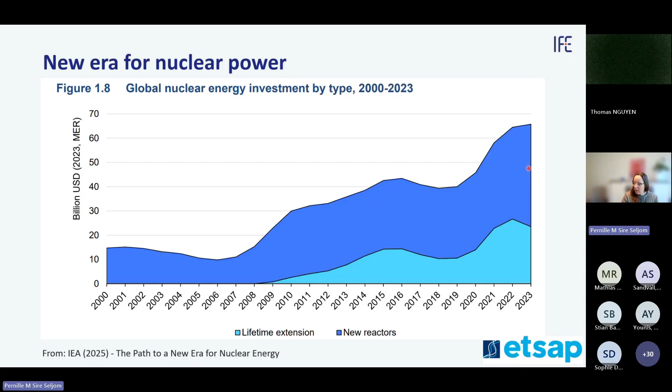Just a very short background, and I'm sure most of you are familiar with this, but we see that nuclear power is taking a larger and larger share and is becoming increasingly more a part of the energy system. But what we also see is that a lot of what is currently under construction is happening not in Europe, but in China. Most projections and scenarios, including those from the International Energy Agency, assume that we'll see growth in nuclear power towards 2050.

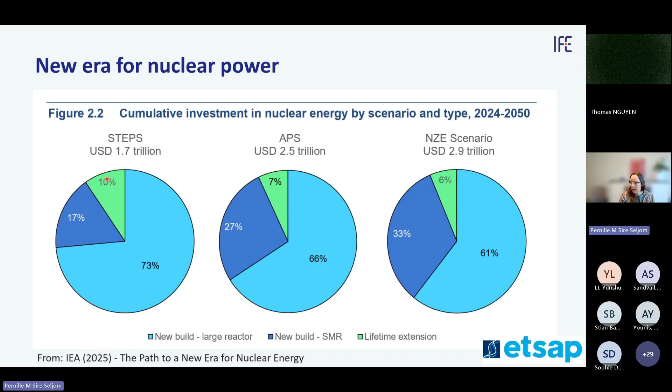Here are 3 different scenarios that the IEA has, and that includes both new large-scale commercial reactors, new builds, the so-called small modular reactors, and also lifetime extension of commercial reactors.

These small modular reactors have renewed the interest in nuclear power. They are smaller in that they do not have the same capacity as conventional nuclear power, but there are many different concepts that different actors are working on developing around the world, with different technology solutions, cooling solutions, and so on.

But in the first run, in the near term, we see that what will come as small modular reactors will be a downscaling of commercial nuclear power, but in the long run it could be new technologies that emerge.

And the advantage with these reactors is that they are small, meaning you can also locate them in the grid where it's easier to locate them, where there is space in the grid, for example. And they are intended to be modular or more prefabricated than commercial nuclear power.

And also, since they are smaller, maybe they can be located closer to population, and it's easier to use excess heat and so on. But there is great uncertainty related to the development of this technology - what will be the winning technology in the end, and what will it cost, and so on.

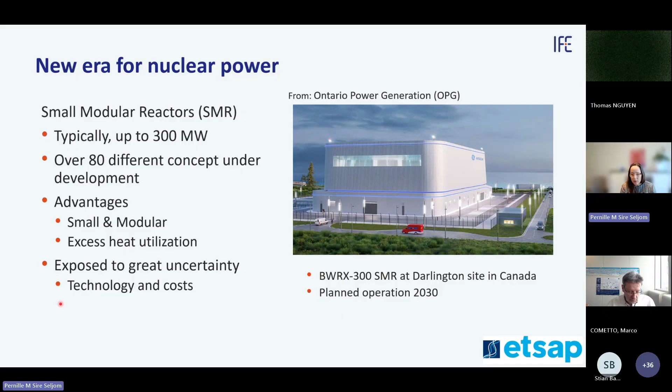But there are small modular reactors under construction, and this is from Canada, where the first module of a 300 megawatt module is under construction and is planned to be operated in 2030.

So now I'm done with the background, a bit about our workshop. That kind of is the basis for this project.

We were 23 participants from 13 different institutes, 11 nationalities. We also have participants from the Belgian Nuclear Center and IAEA. And we worked on how do we actually model nuclear power in energy system models. And we also discussed and found solutions for what are the key challenges and where are the solutions for us going forward.

So if you want to read details on how different teams have modeled nuclear power, I recommend you read the reports. But what we see is that some teams model conventional nuclear power only, some teams model small modular reactors only, but we also discussed maybe it's not that different how we model these types of technologies. But what we see is that there are very different ways - the technology detail level incorporated in the models varies a lot between the different teams.

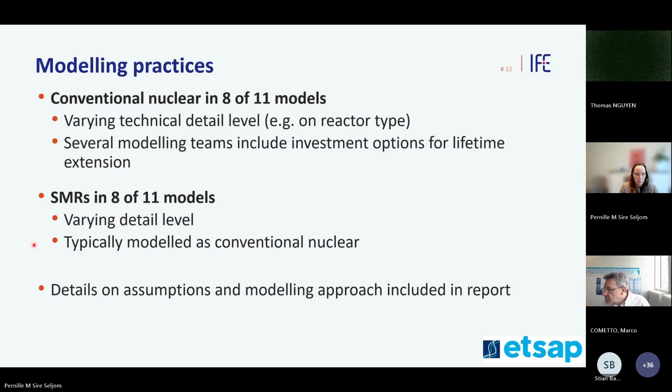And also some teams mentioned that small modular reactors is just modeled the same way as conventional nuclear power, with different assumptions maybe on costs and when it can be available and so on.

So in the survey, we asked, what are you doing of assumptions that have the biggest effect on your results on nuclear power? And the first on top of the list was costs. So it was a key finding that most teams find that cost is the main assumption that affects the investments in nuclear power the most.

And then it was primarily investment costs, because that's the larger part of the cost share. Second was the energy system configuration - so the energy system that the nuclear power will be placed in. What are the other energy opportunities in that region, country, continent?

So how much nuclear power you get really depends on how much other renewables you have available. And for example, if you have stringent land use availability, that could also affect investments in nuclear power. So it really depends on the setting of this energy system.

It was also mentioned that how we model operational flexibility and cogeneration of both heat and hydrogen affects the investments - that was third. And then it was mentioned how we include resource and material supply chains can also affect investment decisions on nuclear power. For example, water availability for cooling, or the supply of fuels, uranium, for example, or for the technology itself. And then other constraints like energy security and so on was also mentioned as important assumptions that affect the investments in nuclear power.

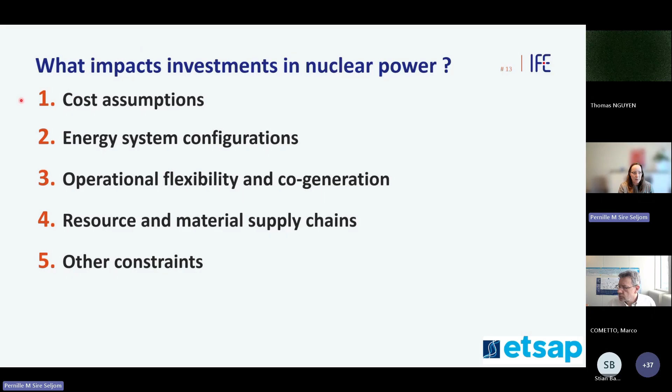But on the top, it was costs and investment costs, and it was energy system configurations.

We also, in the workshops and the report, went through that costs are different things. And we made these kind of pie charts for all the different modeling teams. But what we see is that the overnight cost has the greatest share of the cost of nuclear power. But if you go to the right here, this is what is typically an input to a TIMES model. So there are several things that can affect the cost of nuclear power in an energy system model.

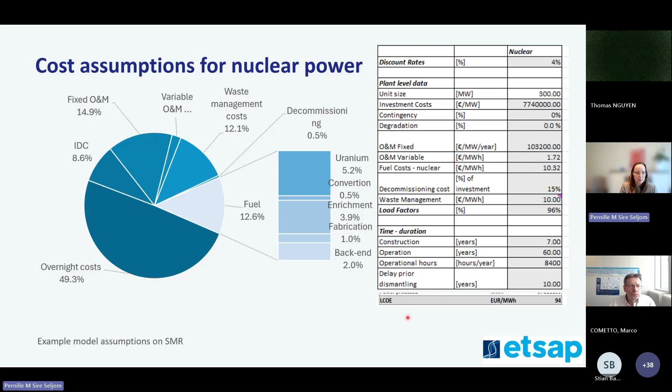So you will get more inputs on the different cost components in the report. And all the teams, they acknowledge that the costs are difficult, but we also challenge them to say, okay, but just put what you have now or what you have used before. And then we compared the LCOE of the different teams.

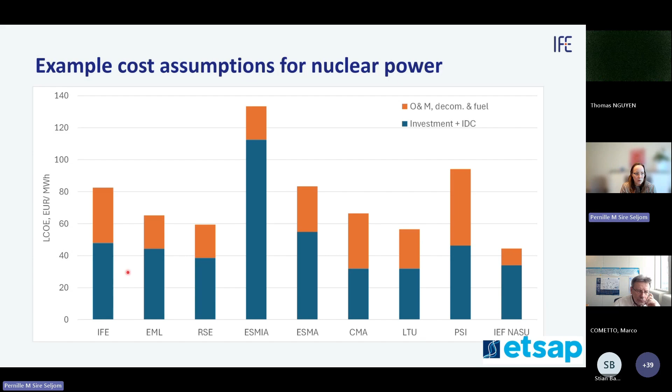And we also see there's differences in the distribution of the investment and interest during construction and the operational costs. So there are differences, but all of us, all the teams, acknowledge cost is difficult, and using one cost in many cases doesn't make sense.

So we identified some modeling challenges, and the first was how do we find costs? There is a large uncertainty in the cost of nuclear power. First of all, there has been very little conventional nuclear power built in Europe in recent years, because a lot of these teams were European, as the workshop was in Brussels. We also don't know what will be the cost development of the small modular reactors.

There's also uncertainty in policy and regulation. Maybe some countries would like to subsidize nuclear power, and then a techno-economic model maybe doesn't make sense because it's a desired option independent of the techno-economic profitability, or you need to have policy in place to have nuclear in a country. So there's uncertainty in policy, also uncertainty in supply chains and material needs, and small modular reactors is not one solution. It's a lot of different concepts and solutions, and the difference between third generation and fourth generation. So it's actually more than one. It's not just to put assumptions of one solution.

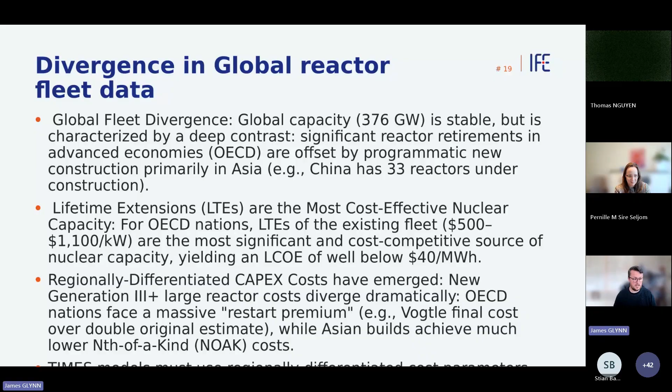Cost overruns and construction time rising up anywhere from 7 to 12 to 14 years in some cases, while Asian builds are being achieved on time and on schedule, probably at a quarter of the price and in 3 to 4 years. So this cost differential needs to be taken into account depending on what region you're modeling in your TIMES model.

While there's an awful lot of talk about small modular reactors, they're still pre-commercial. There's only one that has a contract globally, in Canada, and the promise of small modular reactors is that they can remove the cost uncertainty and bring it into a factory to regularize and modularize construction. But to do that and have energy technology learning, we need an order book of 5 to 10 reactors to start bringing down those costs.

One of the biggest barriers that are a concern for fourth gen reactors and small modular reactors is the fuel supply. So high assay, low enrichment uranium isn't produced in Western nations or in the OECD. It's produced in Russia and in China. And so the supply chain for fuels for SMRs is in the hands of a few countries, and that would by some be considered as energy security or geopolitical risks.

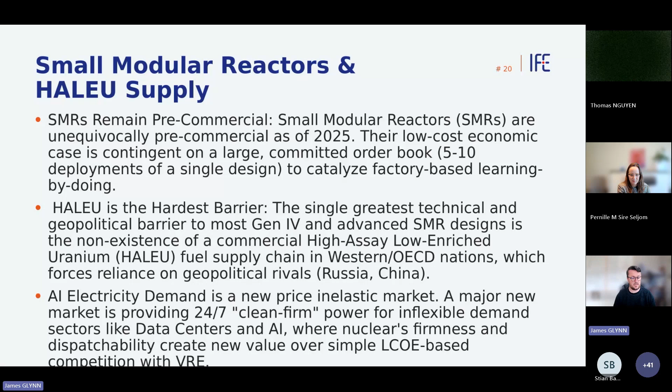We're also seeing that electricity demand from AI and large data centers is driving this new demand for clean, firm power that is price inelastic, i.e. doesn't care too much about the cost of electricity, and is really driving interest in new reactors, or small modular reactors, and restarts of nuclear power in general, to restarts of units in the US.

So there's a lot of data in the technology brief. I'd encourage you to go and have a look at it. It's geographically differentiated between North America, Europe, and Asia and the rest of the world. And it gives you some of the data here that I'm listing. So the cost of lifetime extensions, regionally differentiated capex costs, gives the lead-in construction time, which is an issue, and a binding constraint in models.

It gives some details on unit commitment capabilities, so ramp rates, minimum stable levels, that's seen within historical reactor operation. And there's some details then about endogenous learning rates that are required to move from first-of-a-kind reactors to nth-of-a-kind cost reductions. There's also some details about the needs for supply chain modeling for HALEU and the next generation of fuel supplies required for SMR and Gen 4 reactors. That's all I have.

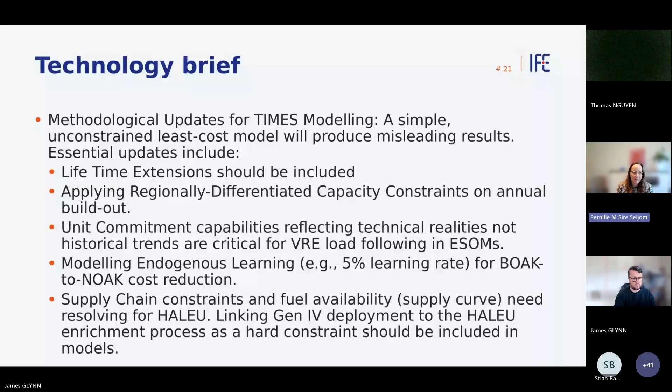Pernille, so I'll hand the floor back to you. Thank you very much. So if you are modeling nuclear power in any type of investment model or a long-term energy system model, I recommend you to read the technology brief. And now we'll move on to Yunshu Li from the IAEA that will present how we should represent nuclear power in energy systems.

Thank you. So now it's not in presenter mode. We need to change it. Sorry. No, it's not easy. But you are also writing a report, right, on modeling guidelines? Yes, indeed, we are doing that. Thanks for introducing that to the audience here. Do you see it now? Yes, now it's perfect. Okay, perfect.

Okay, great. So thanks very much for having me on this webinar. We are very happy to be here. Actually, some of my colleagues are also joining because they're interested in the work that you are doing. So I am from the Planning and Economic Studies section. We do modeling, we do economic analysis, we also do capacity building for countries. So part of our work is actually technology agnostic. We don't just look at nuclear, but we also look at other technologies, particularly in our capacity building work. We work with countries that do not have nuclear yet. But as our name suggests, we also focus sometimes on looking at nuclear.

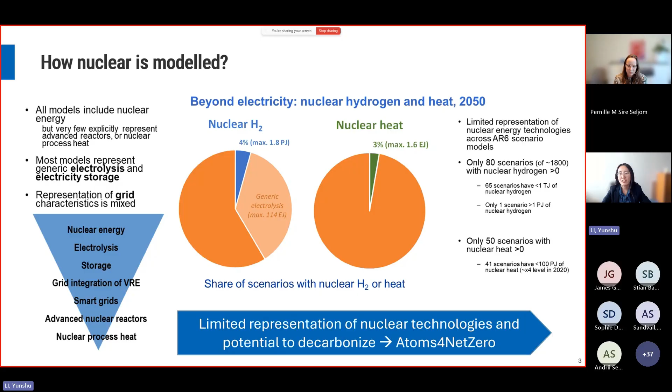And therefore, we actually have an initiative called the Atoms for Net Zero Initiative. This initiative is aimed at supporting member states in evaluating nuclear's role in net zero pathways. What we do within the section and within the IAEA is provide analytical tools, data, and benchmarks for energy system modelers. This is because we recognize that the way nuclear is represented in models can materially shape policy outcomes.

This is not to say that we want to shift the way nuclear is represented to favor nuclear. We just want nuclear to be presented in a way that is fair and accurate based on its technological and economic parameters. So our current work includes some meetings. We have met with some of you in our in-person meetings, or online in our consultancy meetings. These consultancy meetings bring together the modelers and IAEA staff, and we discuss specific representation problems in models.

We also have technical meetings. These are wider meetings, exposed to a wider group of experts, and we convene on the use of the modeling tools, and sometimes also discuss the modeling methodology behind the results. In addition to that, we also offer direct support to modeling teams in different countries on evaluating nuclear's role, either by teaching them how to use the model or providing some form of analytical support.

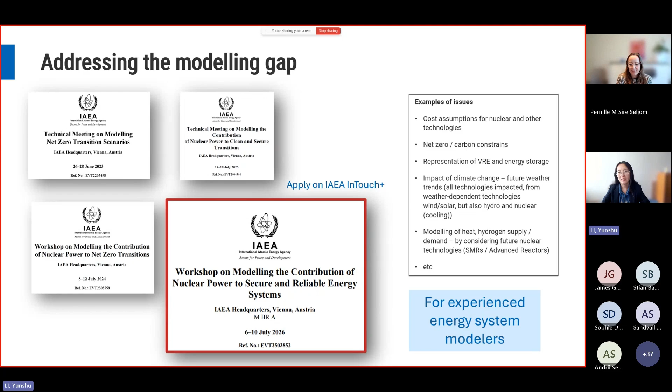So then maybe we can move on to some of the key points or key issues that we think are important to the modeling of nuclear power.

So the modeling pitfalls we often encounter with capital costs in models is applying a single global cost without specifying where the projects are being built, and the status of the design, whether it's first-of-a-kind or nth-of-a-kind, and also mixing cost definitions. Are we talking about total project cost for nuclear, but only overnight capital costs for solar and wind? That is something one needs to be rather careful about.

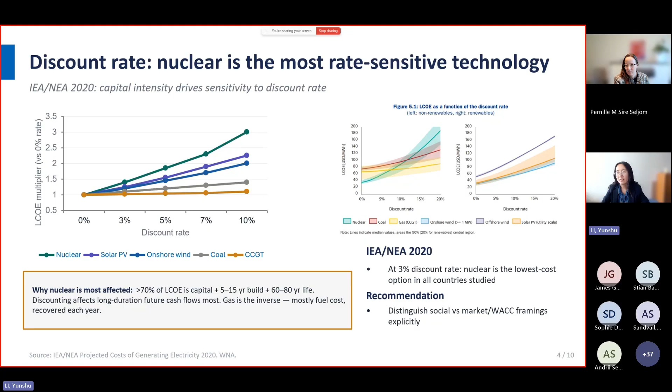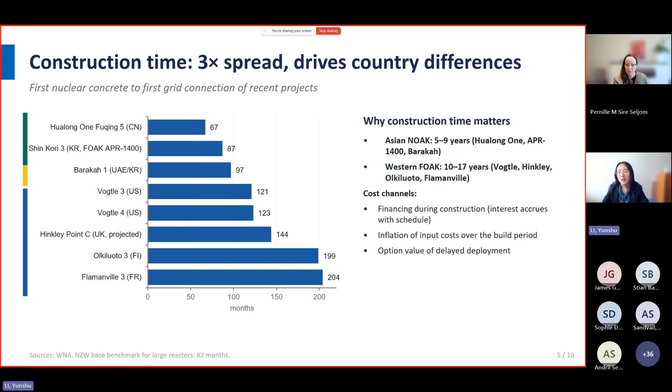The next thing, which the colleagues have already alluded to, is the representational flexibility of nuclear in the models. This example is actually from my colleague, Marco, who is also currently in the audience.

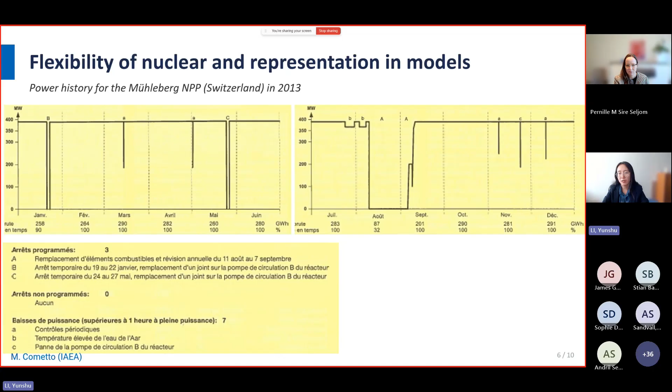However, this is not always the case. This is more of a matter of economics rather than the nuclear's technical capability to ramp or not ramp. When we look at the French fleet, we actually see that in France, there are quite a lot of nuclear reactors, so some of them would have to operate on a margin. This is a power history of a French PWR reactor over a period from 2008 to 2009, over around one year. We see that, say, like a 10-day period around Christmas, circled by this dotted line here, the nuclear power plant is actually able to do this kind of load following.

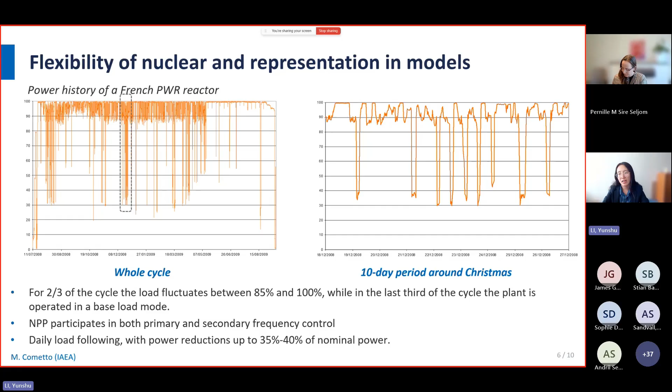For two-thirds of the fuel cycle, the load can fluctuate quite a lot, but in the last third of the cycle, the plant is operated in baseload mode. This is actually a restriction on the technical ability of the nuclear power plant, but for the first two-thirds of the cycle, there is nothing that says nuclear power plants can't ramp. We see the same for German reactors - six E.ON nuclear power plants during 24 hours. We also see that they are able to change their production.

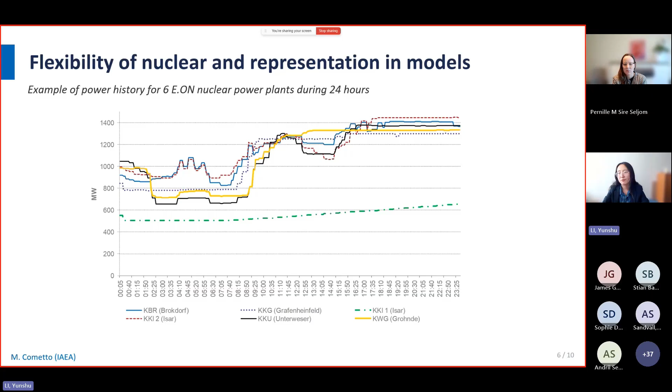I will just mention this part here. So we have spoken about how flexibility is a characteristic of nuclear power - it is possible for nuclear power plants to do that. Within the model, how this is represented can also have an impact on your results.

A researcher, Jenkins, in 2018, published a paper that looked at modeling of a US Eastern interconnection model. In that model, they were explicitly testing how flexibility would affect the results. For instance, if you have a must-run nuclear power plant, meaning it has to produce all the time at a flat profile, then you will see a lot more renewable curtailment versus full flexibility, where your curtailment will be reduced because then your nuclear power plant can actually do some variation in its production. We know this theoretically, but does this really occur in reality?

If this does occur, then if nuclear power plants are always being operated as a marginal power plant, on the margin, it might face this issue called the missing money problem - it may not be able to recover all of its costs incurred just from the energy market alone. And that is why we often talk about these out-of-market revenues for nuclear power.

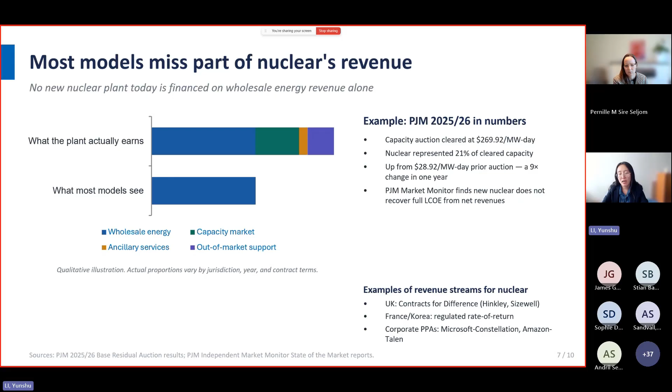Continue, great, please, thanks. So another point we want to talk about when we talk about modelling nuclear is obviously nuclear's application for heat production. IAEA has done quite a lot of work mapping how nuclear can produce heat and support industrial processes. We see that for some processes which require very high temperatures, nuclear is actually in a perfect position to produce that kind of heat.

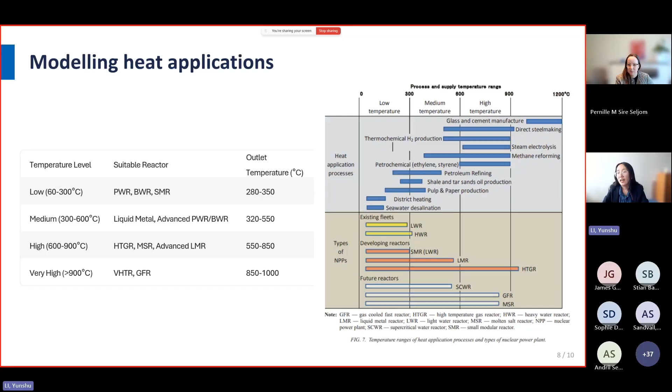One thing we also discussed quite extensively is that cost optimization may not be the only question one should think about, since the objective of society is not just cost, as was also mentioned earlier. So the real question is rarely, is nuclear the cheapest? Should we have nuclear at all? We have colleagues, Rocco, who actually did some parameterization of different dimensions surrounding other aspects that policymakers would consider.

In addition to cost, some examples where this is true in reality are the kind of phase-outs we are seeing post-Chernobyl, post-Fukushima. This phase-out is not because nuclear was driven out cost-wise, it's because there are other factors that are currently being considered.

Another thing one needs to look at is that the inputs are not known with certainty. As we have also seen from your modeling inputs, you have quite a high range, a huge range of different costs put in for nuclear. That would be one type of uncertainty we know, not just uncertainty between models, but also uncertainty into the future. We don't really know how much things are going to cost.

So we have colleagues who have done work related to long-term and short-term uncertainties. Also, when we look at weather patterns, there are short-term uncertainties that will affect the power market and therefore affect nuclear's role.

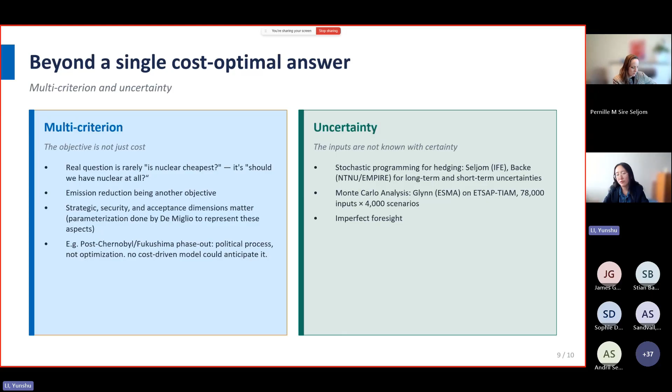There are a lot of other parameters that warrant attention, I will not go into them. Each of these parameters has its own modeling pitfalls. In our modeling guidelines, we are trying to describe them for treatment recommendations.

As we know, with growing energy demand from data centers, some may say this demand profile in the future would be flatter because data centers require more constant load, but we have also seen there can be power surges related to the current use of non-traditional AI. That is something that is maybe unpredictable, and we are particularly interested in including this aspect in the guidelines. If you have any inputs, we would be very happy to welcome that.

For the next steps, we have already mentioned we are looking for review by end of Q2. We are looking for publication, and we want to present this during the meeting in July in Vienna. So if you are here in Vienna, maybe you will be able to see the final outputs from this work. Thank you very much, and sorry that I ran a little bit over time.

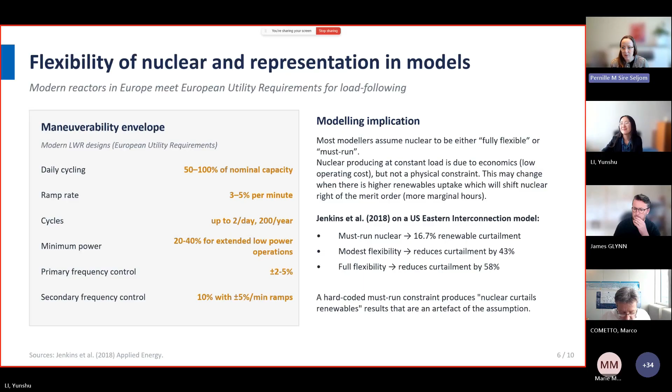Now we will just go a very short deep dive into how we can model, with some examples of modeling of nuclear in TIMES models. We will start with James Glynn, who will illustrate some analysis related to data centers and nuclear.

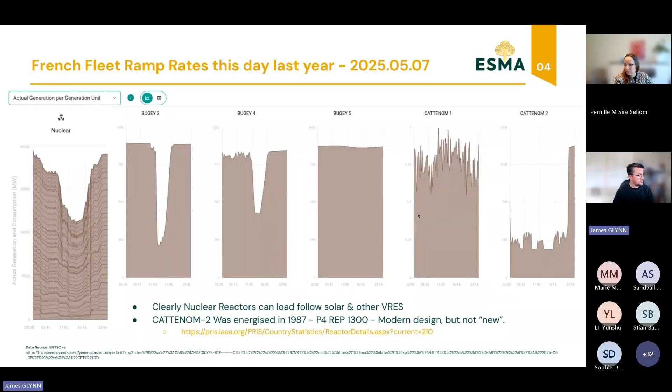The other thing I want to say is that these two reactors on the right-hand side are modern designs, but they were built in 1987, so they're not particularly new in their level of advanced rampability or capabilities. So that's just a baseline: what can individual units do in the French fleet?

So then looking specifically at — sorry, this is jumping around the place — data centers in Ireland: they consumed about 22% of electricity demand last year. It's probably the largest national share of electricity consumption by data centers globally. You see other hotspots in Virginia around the Pentagon in the US, similarly in Paris, Frankfurt, and increasingly in Tokyo and Beijing. But in Ireland they're already large and growing at a significant rate, about 6% electricity demand growth year on year, and that's outstripping the ability for new wind and solar to provide new generation and reduce the carbon intensity on the grid.

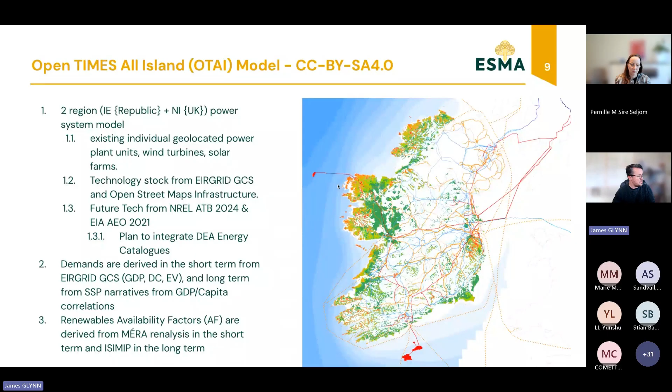The demands are from EirGrid GCS, kind of short-term projections, and then the long-term were derived from SSP narratives, and then the operation of wind and solar is based on weather reanalysis in the short term and climate-adjusted Earth system models for the future.

So very briefly, and Pernille, tell me if we're maybe 2 or 3 more minutes.

So typically we haven't really included operational unit commitments in TIMES models. So just very briefly, I've included nuclear reactor unit commitment ramp rates and cycle rates as best I can, following this updated data from the energy technology brief, but I haven't included that ramp rate and minimum stable levels as a function of the fuel cycle that Yunshu mentioned earlier. So merging unit commitments and dispatch modeling into TIMES-type modeling is what I'm exploring here just for the power sector.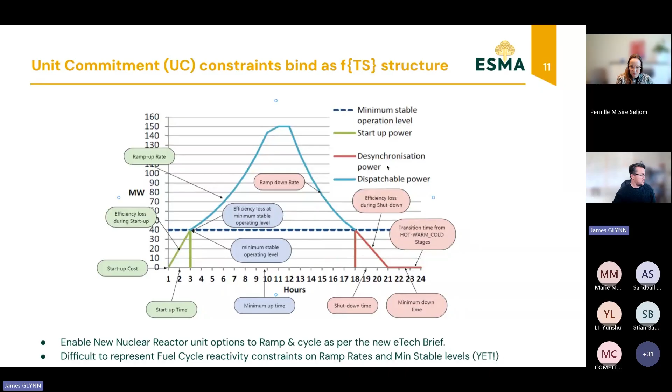The other thing I would say, and I've said it quite a few times in these closed meetings, is that our time resolution really matters to how we capture the variability from renewables for many different reasons. But within TIMES models, given that we're not just modeling power, we're modeling all sectors, the whole system, when we start to go to hourly and 15-minute resolution, you can create models that are in the order of 200 gigabytes to a terabyte of RAM, and it just becomes nearly impossible to solve.

So being very careful about creating your time structure is something that I've talked about before, and again, I have this hybrid time structure where I'm trying to capture the moments and the minutes and hours and weeks of maximum stress on the Irish grid. So maximum demand, maximum generation, maximum wind generation, maximum solar, and then the lowest generation weeks, so the Dunkelflaute for wind and solar, and replicate that going forward.

So then the scenarios that we ran is not just 2 or 3 scenarios, it's looking at different time resolutions with unit commitment, with discrete new capacities turned on and off, with construction lead times turned on and off, with critical mineral supply chains turned on and off, forcing nuclear on and off, and then having electricity demand ramping or growing faster because of data centers.

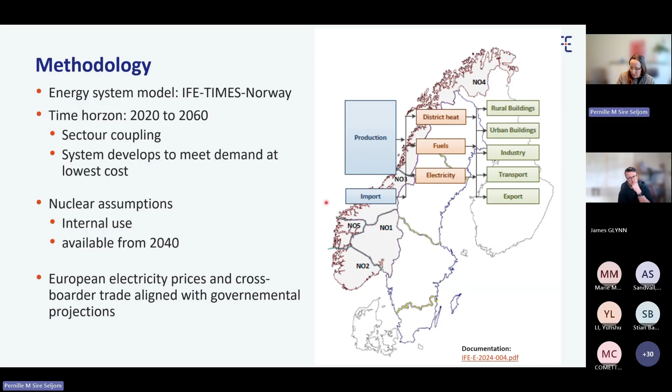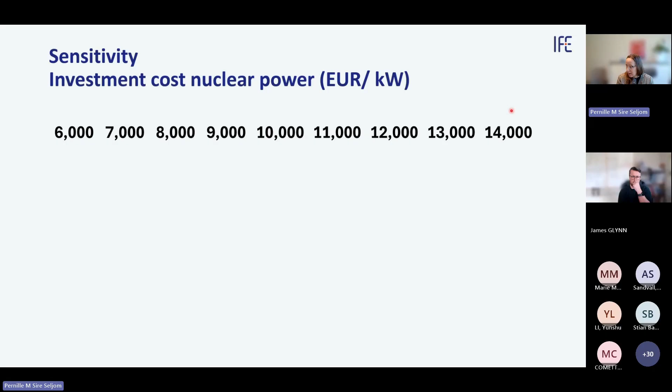I will skip it, but we have used our Norwegian TIMES model, and Norway is a country without any nuclear, but nuclear power is very high on the political agenda. So we have to include it in our analysis to be relevant as researchers. But I will just skip what we did. We did sensitivity because we ended up with what should we use for investment cost in this analysis. And if you look at investment cost of nuclear power, we could see conventional nuclear to be around 6,000, but the Norwegian authorities reported it to be 14,000.

But we also recently had a report ordered by the government about the role of nuclear in Norway. And this report had the cost of small modular reactors ranging from 11,000 to 18,000. But also here we need to have in mind there's a difference between first of a kind and nth of a kind, because here it's a 2040, 2050 perspective.

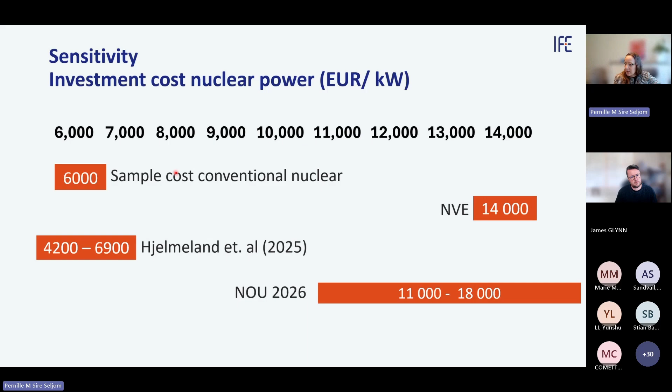And if we have a low cost that we assume here, we can get approximately 15 modules of 300 megawatt SMRs with a medium demand and 30 modules with a high demand. So this is for us maybe an indication of what is the maximal potential of nuclear in the Norwegian energy system towards 2050.

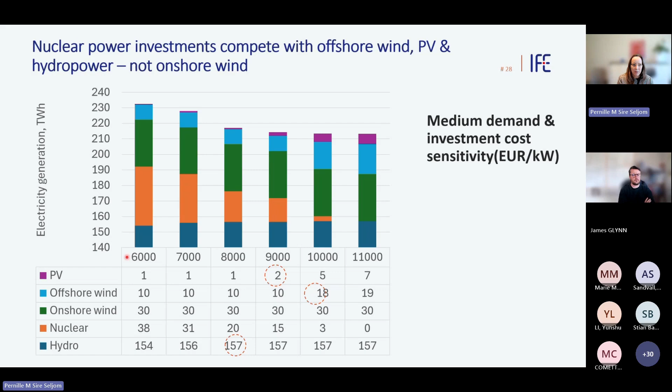So that was what we had on the agenda. Any comments or inputs or questions? Anyone who wants to share anything? We are open. I like what has been mentioned here earlier, that nuclear power is complicated, so it means that we need to work on this together. So I see maybe a hand, Matthias.

Yes, hi. Thank you a lot for the presentations. Can you elaborate on what you discussed with respect to the uncertainty analysis? Because it seems to me that including forecast errors or balancing markets is a system cost contribution that is very tricky to account for properly in planning or capacity expansion modeling. Yes.

We have some modeling teams in the ETSAP community that include these markets explicitly in the models, and we have some teams that don't. But you saw in the presentation of Yunshu that the income is significant in these markets. So it would be really interesting if more people could see if including more than energy markets will affect investments in nuclear. I'm not sure if I answered your question.